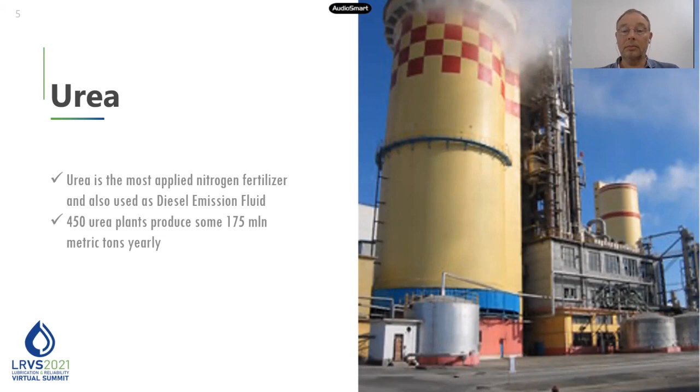The safety incidents of high-pressure rotating equipment in urea plants are related to several risks. First, the high pressures at the discharge side, 150 to 200 bars, while at the suction side there is relatively low pressure, 1 to 20 bars. A very corrosive medium at the discharge side with risk of backflow, this corrosive medium being the intermediate product ammonium carbamate. There are crystallization risks and long on-stream periods. Some plants have annual turnarounds, but some even every 6 years.

High pressure rotating equipment is typically running at maximum loads, and there is a release of toxic ammonia or CO2 and overheated steam from turbines in case of a leak.

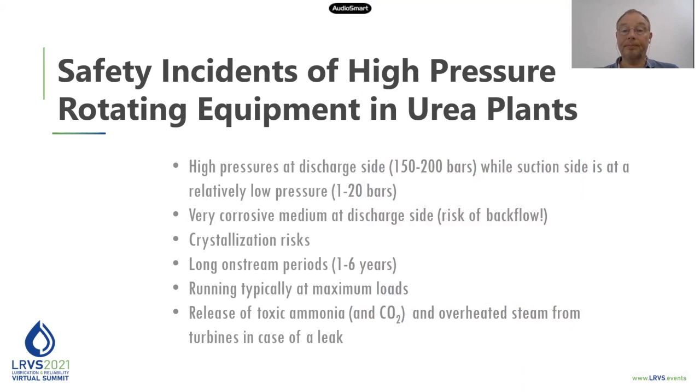Let's discuss the CO2 compressor in a urea plant. There is no spare position, and typically the CO2 compressor is operating at maximum load, determining the urea plant capacity. In the early days it were reciprocating type compressors. Later, centrifugal types, inline centrifugal types, and now more and more integrally geared CO2 compressors are applied. Up to 20 megawatts is the power level, and typically the driver is a steam turbine, or it is power driven.

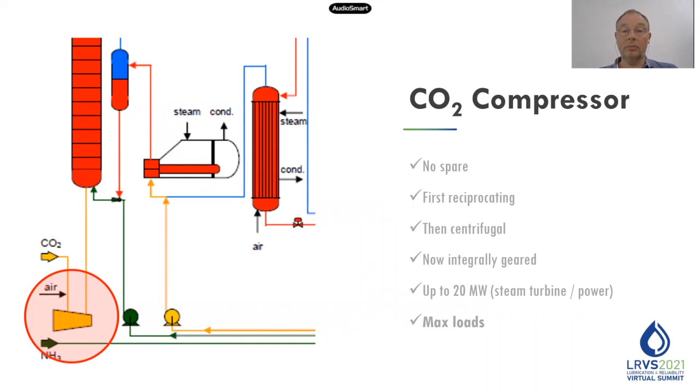Here you see some pictures above of the reciprocating type, on the left side the inline centrifugal type, and the bottom side the integrally geared CO2 compressor.

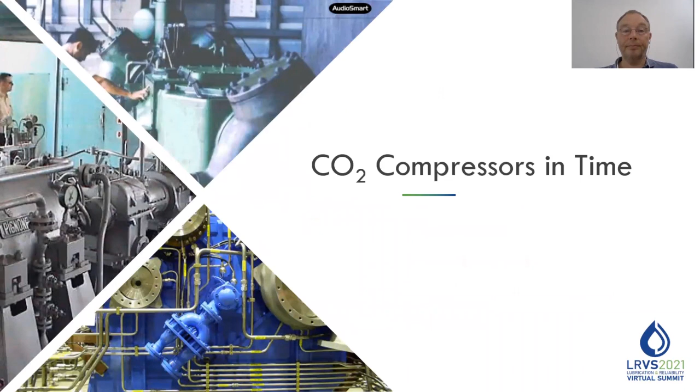Then we have the high pressure ammonia pumps. Here we have one in operation and one spare position. In the early days, and still today, you see reciprocating pumps with the benefit of low power consumption, but also more centrifugal types. Power level is 2.5 megawatts. There is a risk of vibrations, especially with reciprocating types, and also the old designs of reciprocating types have oil seals. And also these pumps operate at high loads.

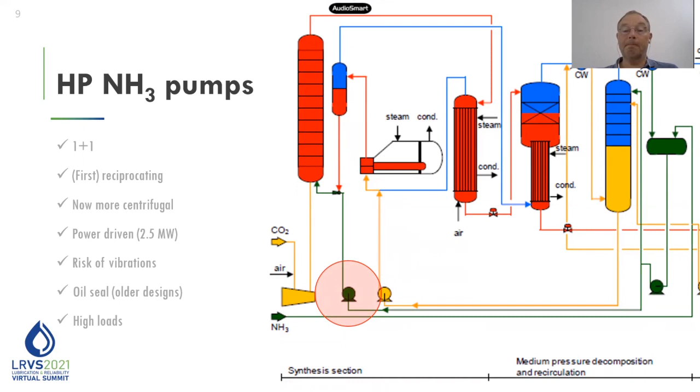Then we have the high pressure carbamate pumps. Also here, one in operation, one spare. It can be a reciprocating type, or nowadays more and more centrifugal types. Power level is 1 megawatt. In these high pressure carbamate pumps, there is a risk of vibrations, crystallization, and cavitation. And again, these pumps also operate at high loads.

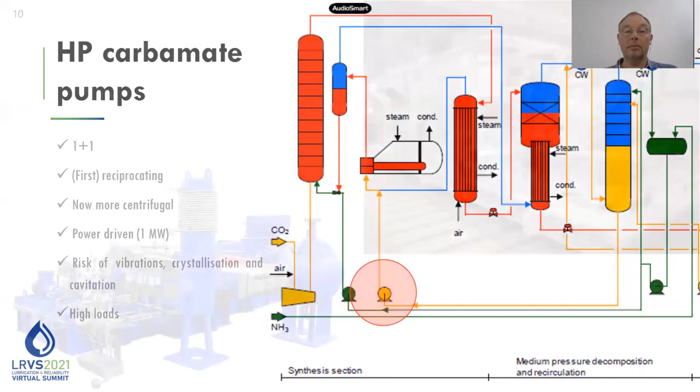Here you see the pictures on the left bottom side, a modern reciprocating high pressure pump, and on the top, a centrifugal type.

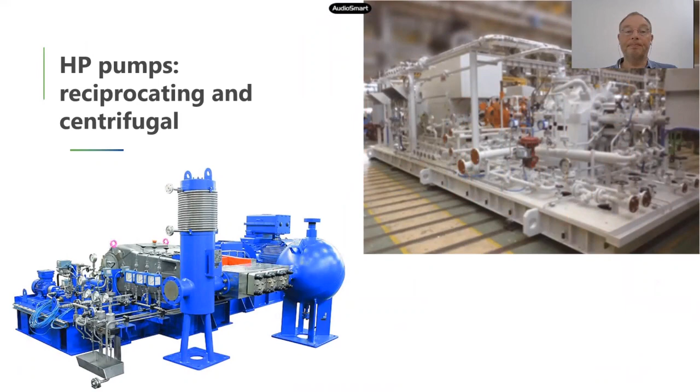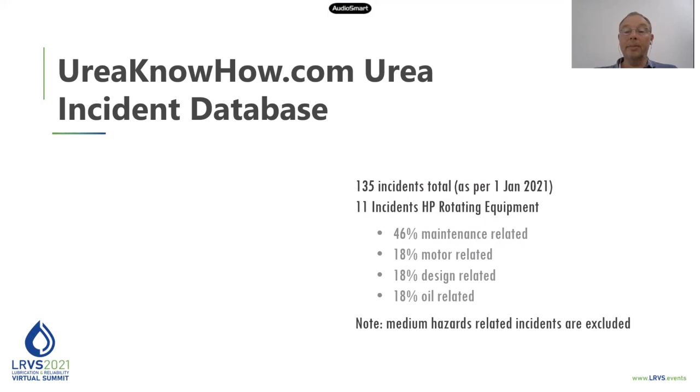The ureaknowhow.com urea incident database, available as open source on our website, contains 135 incidents totally as per January 1st of this year, and 11 incidents are related to high pressure rotating equipment. Nearly half are related to maintenance, 18% related to the motor or engine, 18% related to design failures, and 18% are oil related. We have excluded from this list of 11 incidents the medium hazards related incidents.

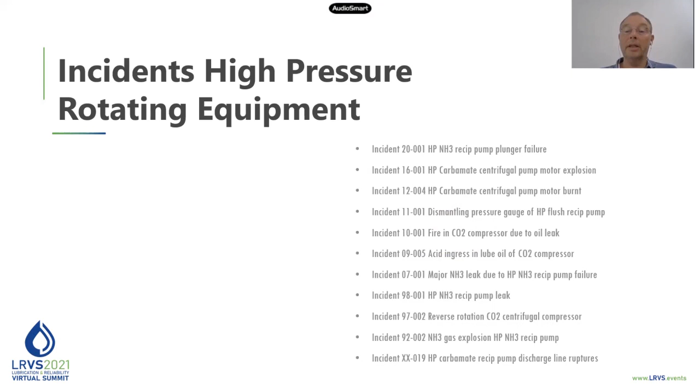I'd like to elaborate on two incidents which are related to oil. This is an incident which happened in the year 2009, and is the 5th incident uploaded in our incident database. There was a chemical cleaning of the low pressure steam drum in progress with acetic acid.

Nitrogen at 5 bar was being introduced through the bottom via a hose pipe for mixing purpose. Due to multiple uses of nitrogen, pressure dropped at the utility header, and the acetic acid flowed reversely into the nitrogen utility station due to the static head of the steam vessel, resulting in contamination of the nitrogen utility station with acetic acid. This nitrogen was also used at the CO2 compressor lube oil system, so acetic acid did ingress into the bearings, resulting in severe damage of the CO2 compressor bearings and seals.

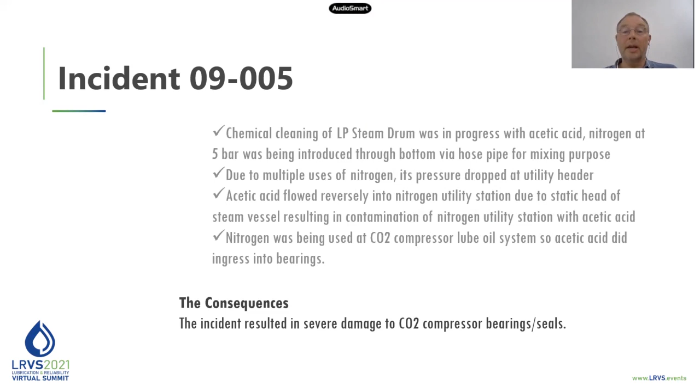This incident shows clearly the risks which typically occur during a turnaround, and a proper risk analysis is good practice.

Then we have the incident which happened in 2010, where a fire happened due to an oil leakage in the compressor. Luckily, the firefighters could snuff out the fire within a short time and could prevent damage of the plant. Of course, the production stopped, and there was a technical glitch as a cause. The fire broke out when oil and gas came in contact with the overheated engine through a leakage in a compressor tube.

This is an incident which happened more often, and insurance companies are very keen on preventing these kinds of incidents. For the lessons learned, we kindly refer to the American Institute of Chemical Engineers paper, Fire Protection and Detection for Critical Rotating Machines, from 2016.

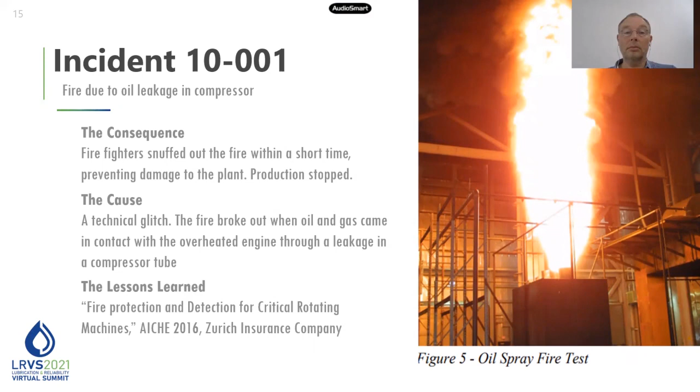What are our proposed prevention and mitigation measures? First of all, companies do not have a memory, and incidents do repeat. We recommend making use of the Center for Chemical Process Safety, the CCPS, risk-based process safety management approach. This approach includes 4 pillars: commit to process safety, understand the hazards and the risk, manage risk, and learn from experience. We hope that our Urea incident database will contribute to this 4th pillar.

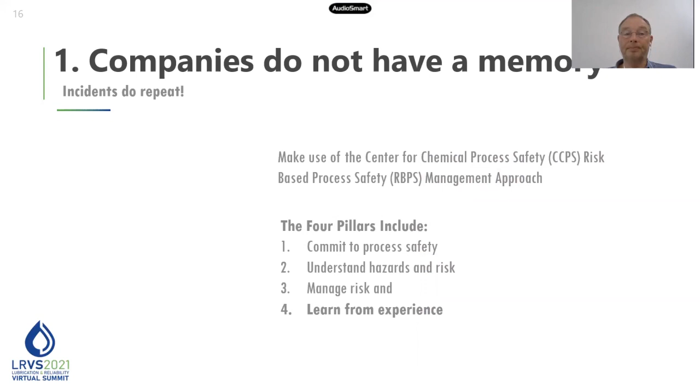Install state-of-the-art leak detection systems. Leaks can occur from flange connections, from valve bodies, from pump and compressor seals, but general leak detection is also important. We'd like to highlight 2 innovative companies here: Gexcon, which can simulate leaks in a very accurate way, and GrandPerspective, which can make visible with special camera techniques any leak in your facility.

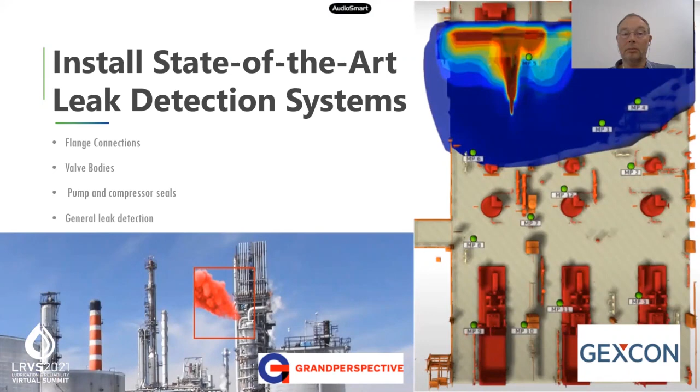Make use of reliable and experienced vendors, because note that ammonia and CO2 are at supercritical conditions at the discharge side, and ammonium carbamate is very corrosive.

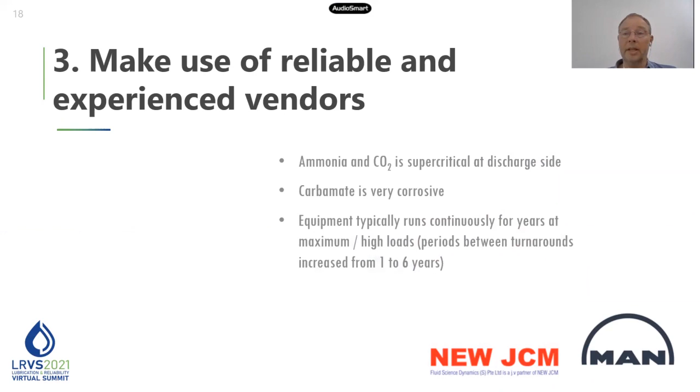Remember that the equipment is typically running continuously for years at maximum or high loads, and that the periods between turnarounds have increased from 1 to 6 years. We have good experience with MAN from Germany and New JCM, an upcoming innovative company from China.

Our 4th recommendation is to make use of proper design, installation, operational and maintenance procedures. Points of attention in Urea plants are vibrations, corrosion risks, wear and tear and fatigue with reciprocating types of machines, applying risk-based inspections, taking care of leakages and fire risks, and oil conditioning is critical. Remember, we are running at long periods at high loads with reactive process media. Fluitec is a recommended company to involve.

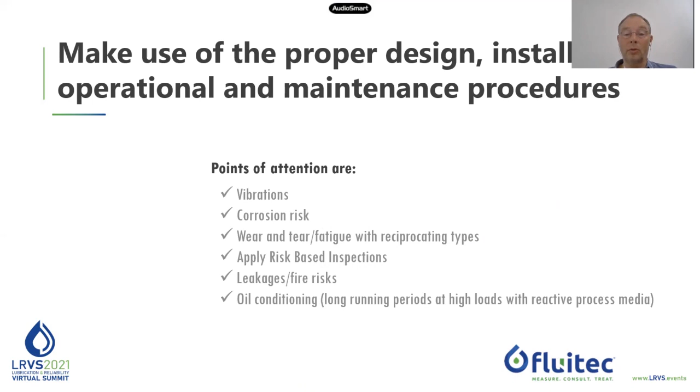That brings me to my conclusions. The UreaKnowHow.com Urea incident database contains already more than 135 serious incidents, of which more than 10 occurred with high-pressure rotating equipment.

To minimize or avoid repeating incidents, we recommend strongly to make use of the Center for Chemical Process Safety risk-based process safety management approach. Involve reliable and experienced vendors, and also pay proper attention to the right design, installation, operational and maintenance procedures. Involve experienced and knowledgeable Urea experts as owners and engineers in your projects and training programs. Treat safety and reliability as your #1 priority. It will pay back.

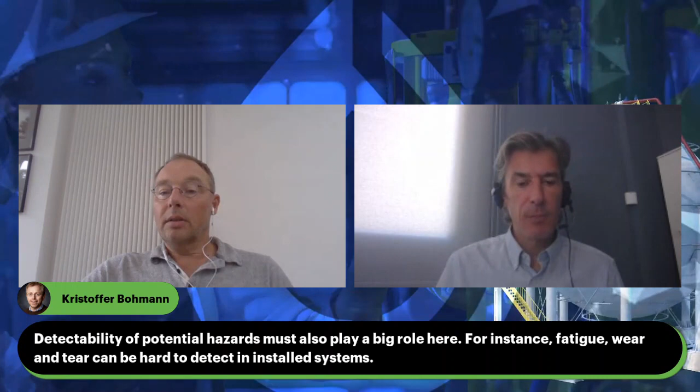So, Kristoffer made a comment about the detectability of potential hazards, such as fatigue, wear and tear. What does this bring to your mind?

Good point again, Kristoffer. So preventive maintenance, risk-based inspections. In urea plants, you have a big issue with fighting corrosion. First you need to know what the failure modes are, so training, sharing knowledge, sharing earlier incidents - that's important. Then you have to know where to look. If you know where to look, you can do these inspections and look for fatigue, wear and tear, especially for reciprocating pumps - there are several cases and incidents related to that. Corrosion plays a role here too.

Yeah, it can be hard to detect, that is true. It can be a unique or first case in the industry in older plants. On the other hand, I think our industry is 70, 80 years old, and if we share more near misses and incidents, more people will be aware of where to look and how to assure safety and reliability in their own plant.